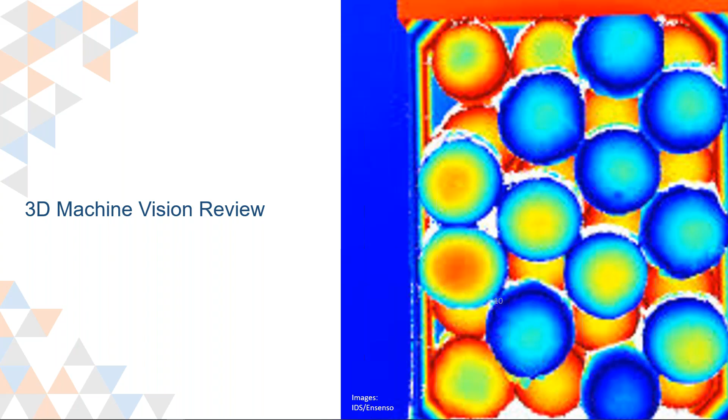So let's start with a 3D machine vision review, going over the concepts of 3D machine vision in the context that we're discussing it today. So really, when we think about practical 3D imaging for automation, it's one of those many machine vision tools that enabled what the marketplace is now calling Industry 4.0, reliable autonomous automation, the ability to have smarter factories, better production, better efficiencies in production. This is what the industrial marketplace is looking for, and it goes without saying that machine vision and its close partners in technology, robotics, and other automation technologies

have been at the forefront of driving these concepts in Industry 4.0, and all are data driven, all are data consuming, and machine vision, and particularly 3D machine vision, is certainly here to stay as a key component of smart manufacturing Industry 4.0. So that's our context as we think about practical 3D imaging in our particular environment. When we think about 3D imaging, we're really asking the question: why use 3D imaging?

The fundamental point, and I think this gets lost in the translation sometimes as we talk about the 3D imaging technologies, is that the entire point of 3D imaging is to provide us some content, some data in the image that comes from a different place than just grayscale or color content, the kind of content you would find in standard 2D imaging in machine vision.

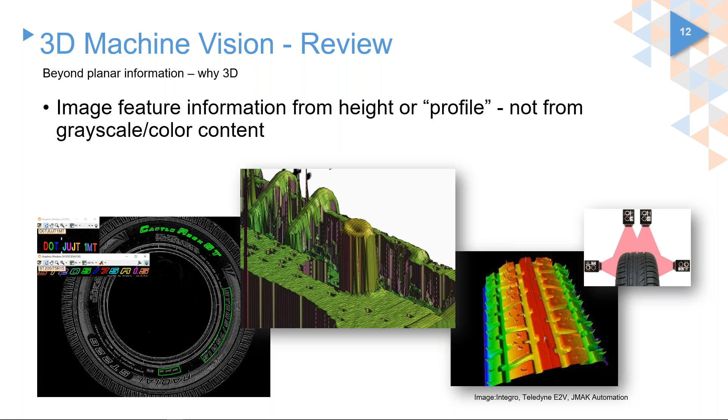So we're not just talking about getting that 3D image, but we want to keep in the back of our minds that we want that height or profile information from the 3D image so that we can use that in our processing. Now, how do we typically use this information? Well, in general,

many of the things that you might think of in 2D machine vision in an industrial environment lend themselves to 3D imaging. Again, in that context where the main point of our work is with the height and profile information. So the ability to look at feature and object geometries for measurement, identification, quality inspection, except that we have the ability to see that in 3D. We can extract information based on the height and planar information of the object that we see, rather than having to segment it based on contrast.

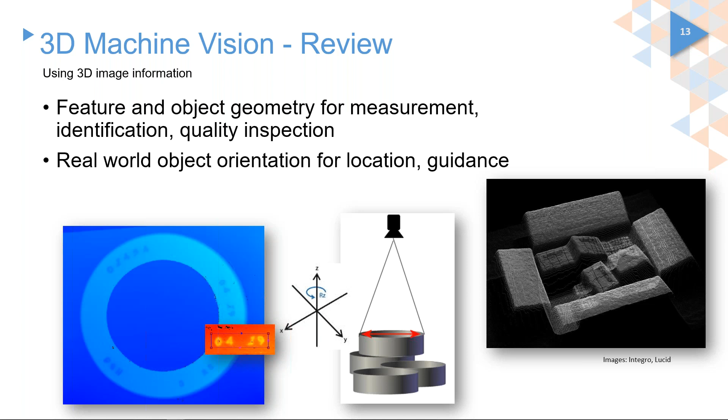Of course, one of the key uses for 3D imaging is real-world object orientation. It may not just be for robotic guidance, maybe for location or other purposes, but that's of course a key capability of 3D imaging in automation.

So what is the basic 3D information that we get? Not just thinking of it as a pretty picture, but thinking of the data and how that data is used in the image. All of the data in a 3D image are points in a world coordinate frame. Now, we'll skip the fact for now that frame may be just the camera. It may be an arbitrary relationship in world coordinates, but nonetheless, all of the data are these 3D points in a world coordinate frame.

And then in processing, the information must be combined or isolated to form geometric structures so that we can do those application tasks that I just mentioned, utilizing that data. Perhaps extract the features, perform measurements, provide locations, and much, much more. Keeping in mind that this is all based on segmentation of these features, not utilizing grayscale, but utilizing height and planar and other primitive geometric information from that 3D image.

A quick word on how the images are represented. I think this is one of the things where first-time users of 3D machine vision, or folks who are just entering into the 3D machine vision space, get a little bit confused and not quite sure of what we are seeing when we look at the 3D images. The vendors of 3D components, the people who create and provide the software, all provide wonderful visualizations of the 3D data. But the point I would like to make here is that these are visualizations and not necessarily the raw data that's being used in your application.

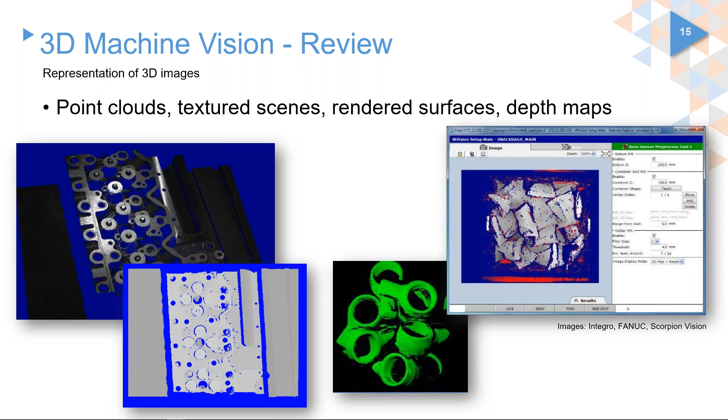So with that, a quick review of how machine vision works within the automation environment. I'd like to move on to some of the evolving technologies and components, and in this context, continue a little bit in our discussion of reviewing what 3D machine vision is and how 3D machine vision works in actual practice.

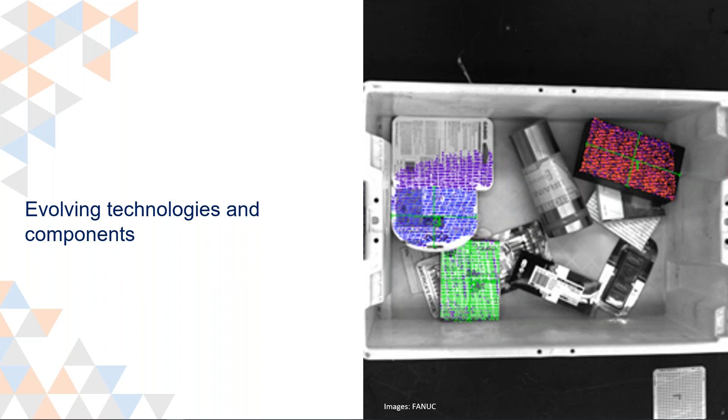The name of our webinar today being Evolving Emerging 3D Machine Vision, I wanted to kind of take that and describe what I think we're experiencing in terms of evolving technologies and components. And one of the big things that's evolving right now is not so much the technology, although I'm going to discuss some of the things I think are really moving forward in technology. But the one thing that I think is a strong evolution is the marketplace evolution.

We're seeing continued growth in the marketplace, and by marketplace, that means those people who are supplying components, supplying technology to those of us as end users. There's continued growth, continued advances in these 3D imaging components and technology, and that marketplace growth is not only, I think, the most interesting growth and interesting evolution in 3D machine vision, but also one that is really going to benefit us moving forward as we find more vendors working to deliver better and better technologies that are applicable to more end use cases.

I think that we're going to see higher usage of 3D machine vision, higher reliability, and less end user concerns about implementing 3D machine vision. So keep an eye out for that. I think that even in a period of several months, we see continued changes in what the marketplace is offering in 3D machine vision and ways that you can use it in your applications.

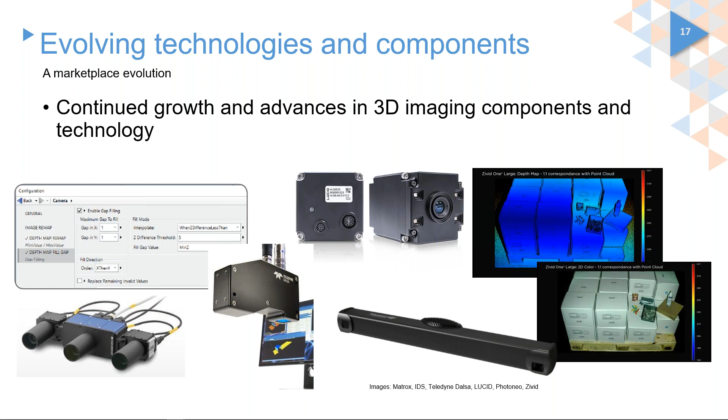So having said that, let's look at some of the technologies, look at some of the components. And the place to start is to understand the role of 3D imaging components. One of the things that gets perhaps lost in the translation sometimes is that a 3D machine vision camera or a 3D machine vision imaging system is primarily an image acquisition device. I'm not going to compare it to a dumb camera, but I want to comment that the device is there primarily for image acquisition and to provide, as we'll learn later, a group of images that when combined or when processed can create a 3D scene that ultimately you can work with.

So given that we're going to think of this 3D camera, 3D imaging system as an acquisition device, what are some of the differentiators? One of the big differentiators in the marketplace is the technique used to capture that 3D information. And sometimes, depending on the technique, you're able to relate a technique to specific use cases for your applications. Some techniques lend themselves to certain applications. Some imaging techniques just plain don't lend themselves to those applications. And we're going to mention those as we go along here.

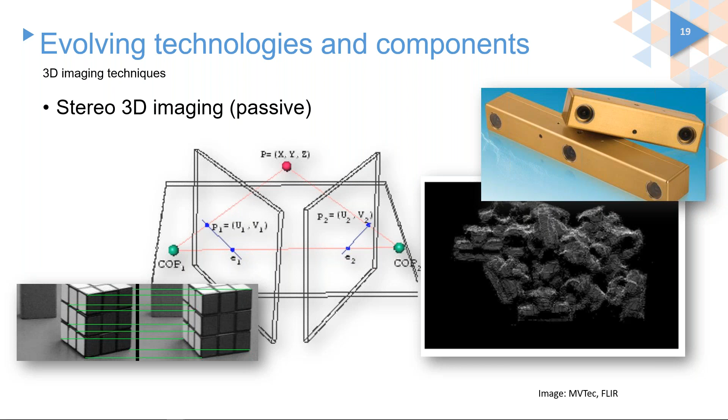I've found in a couple of applications that passive stereo 3D imaging actually can be more effective than some of the other, what we might call more advanced 3D imaging techniques because of certain characteristics of the surfaces you're going to inspect. But we'll call that a basic stereo imaging technique, and then move to another very popular and widely used technique, and that is structured light.

Now, when we're thinking of this as a stereo camera or even a single camera, this is sometimes generically referred to as active 3D imaging. If you think about going back to the binocular or two camera stereo imaging, if we're looking at objects that don't have any texture, what we would call texture in the 3D imaging context is features in a grayscale contrast context that help to identify correlated objects from one camera to the other.

Think of trying to look at a bare wall, a blank wall, and judge the distance to that wall if you have no other references. The same thing happens in 3D imaging, in that if we don't have references to the surface that we're imaging, or to the content on that surface, one of the ways to overcome it is to provide your own references, and that's done by aiming structured light at the objects.

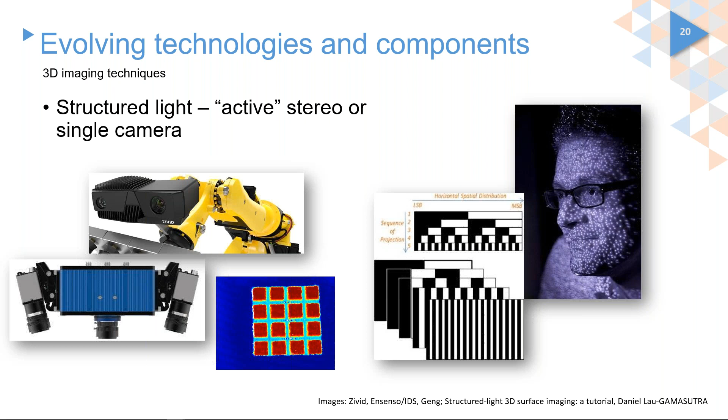A whole different class of 3D imaging in terms of imaging techniques is laser triangulation devices.

Once again, I'm going through some pretty common and widely used 3D imaging techniques, and laser triangulation, sometimes called in the 3D world sheet of light analysis, uses a laser line. I don't want to say simply, because it's by no means completely simple, but it is simple to understand.

We use a laser line and a camera at an angle relative to the laser line, and if you use your imagination, you can see that as that laser line encounters objects of different height, the position of the laser line in the image relative to the object and its background will change.

Now, as the camera is calibrated and physically aligned with the laser line, that camera will start to see that laser line in different spots in the image, and knowing the proper calibration or having a pre-calibrated sensor, you can triangulate exactly where that laser line is relative to height by seeing where it is relative to the vertical location in the image itself.

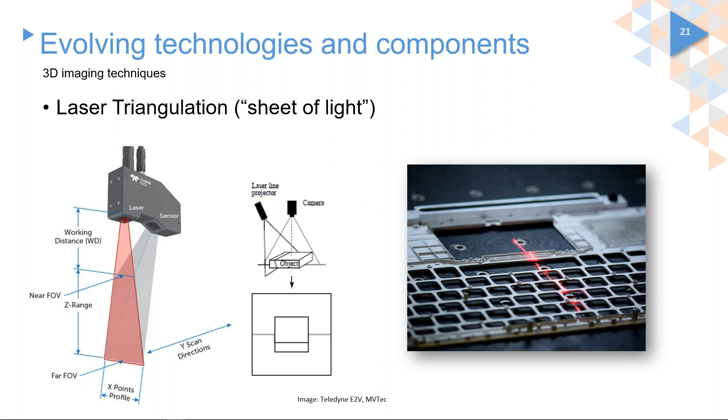In this case, this is a scanning technology where the part or the triangulation device has to be moving as it takes its image, but it's a very efficient device and a very accurate device, having some capabilities in many cases to achieve better accuracy than the first two methods we just discussed.

And in going over some of these basic 3D imaging techniques, one I'd like to include that at one point was considered a truly cutting edge technique, but is falling more, I think, into very mature, very reliable, very usable 3D technology, and that's time of flight.

Now, it is definitely an oversimplification to say that a time of flight camera measures the time between a light being sent out and the time it returns to the sensor.

Time of flight cameras do not actually measure the speed of light, but through different techniques, either pulsing lights or modulating the light in phases, time of flight cameras are able to compare the light going out relative to the reflected light, and by doing so, for each individual pixel on the sensor, analyze the distance that light's traveled relative to the sensor itself.

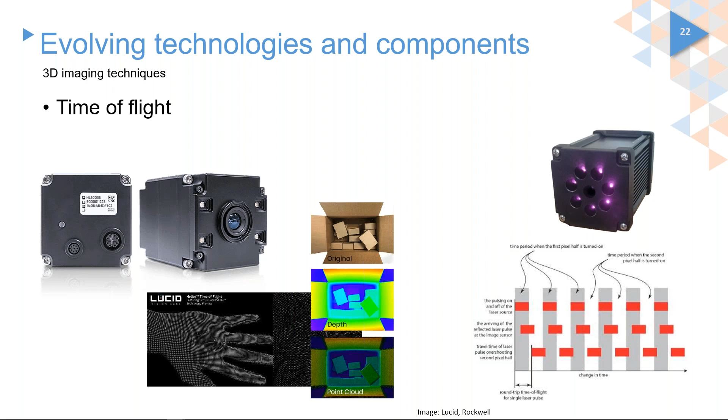And it wouldn't be complete if we didn't talk about image acquisition software in 3D imaging techniques. Why do I group software in with the 3D imaging components? The reason is the software is absolutely required in order to create the 3D image from a grayscale image.

Some of the things that have to be done, of course, are calibration of the camera relative to its scene, so that regardless of the type of inspection, in the case of stereo, structured light, stereo structured light or sheet of light, it can relate that grayscale information to a 3D image.

Some of the execution techniques would be image rectification. That's matching the left and right images to each other. Creating a disparity map. I mentioned that disparity is the difference between the observed location of the object in one image to the observed location of the object in the other. These apply to stereo structured light.

In the sheet of light imaging technique, the software has to combine the individual lines that are taken as the part's moving past the sensor or the sensor's moving over the part. And that combination and translation of the position relative to its actual Z height is a function of software, not accomplished by the imaging system itself.

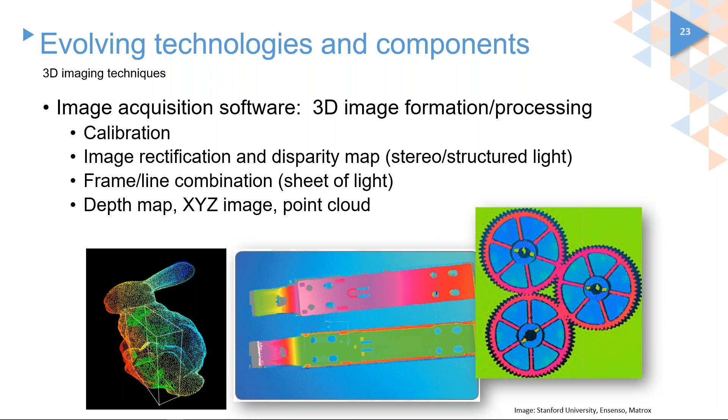And then the creation ultimately of what you end up using in your applications, perhaps a depth map, an XYZ image, perhaps even a point cloud. That kind of processing, again, has to be accomplished through 3D software. The good news is that we find both SDKs and, as we'll talk about in a minute, even onboard software that performs these in our marketplace very, very well and very efficiently.

How about a couple of emerging 3D imaging techniques?

I've mentioned these other techniques for reference, and they are the techniques that I think are more fundamental and more mature in the marketplace. Some of the newer techniques: one is combinational, or what the market calls computational imaging. You can do a lot of things with this, and the baseline premise of computational imaging is that you combine, and that's why it's sometimes called combinational, but you combine multiple images, usually at least 4, but sometimes more, to create a 3D image in a variety of ways.

One of the classics and one of the most widely used, in this new technology, I should say emerging technology, is photometric 3D. Certainly something that's been around a long time, but becoming much more popularized by the readily available lighting techniques and readily available software to do photometric 3D. Shape from focus is another possibility with computational imaging, and even 3D from polarization.

Some of the newer cameras on the marketplace are called polarizing cameras, and they through their sensor provide 4 different polarization angles in the image, and 3D shapes can actually be discerned from manipulating those 4 polarized images.

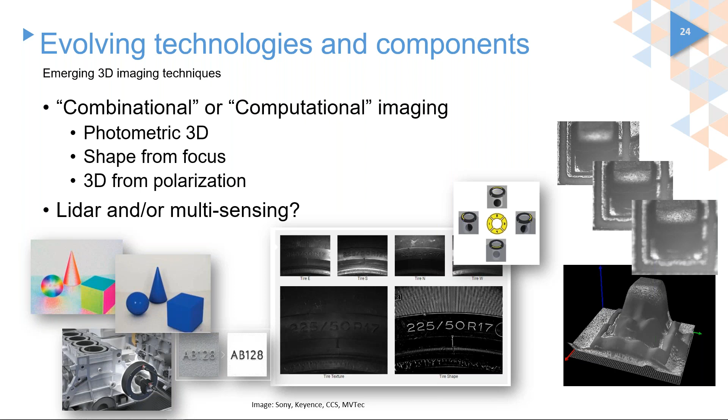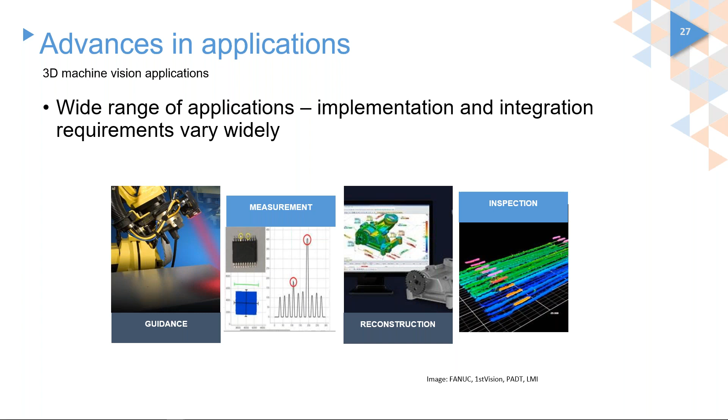And I mentioned a few here. This is pretty straightforward. Guidance, of course, is a well-known task where we could benefit from 3D imaging and robotic guidance. Measurement, when we need to measure things that are not so reliably imaged in a 2D environment. Reconstruction of images for CAD modeling, even just generalized inspection. All of these lend themselves very, very well to 3D imaging. But as I said, the implementations vary widely.

And one of the advances that I see and I can be confident of in the current marketplace in applications and in software is the direction the software is taking us: more capable 3D software, more widespread availability of 3D software, and the development by some manufacturers of more configurable application-based software, so that typical tasks are more automated and easier to use.

The decision you have to make in 3D imaging is, are you going to go down a path of programming, or are you going to try to go down a path of configuration? If you're doing programming, a few libraries exist in the marketplace that are extremely capable and target themselves at providing 3D imaging capabilities for industrial applications. And they're not only expanding in availability, but there's also an expansion of available tools and the ease of use of these tools, say macro tools that allow you to program more easily typical industrial automation functions using the 3D images.

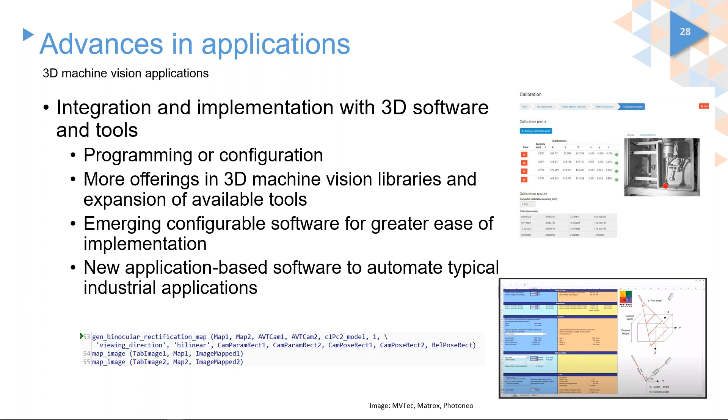And then finally, the application-based software I mentioned, where if you want to do robotic guidance and bin picking, you are able to go out now and find a configurable application that allows you to do bin picking in a somewhat constrained way. But I think we'll see more and more of that, and that's where our application environment will advance in 3D machine vision for industrial automation.

Let's conclude with just a couple of implementation notes. We didn't get a lot into the differentiation and selection of components, but let me just leave you with a couple of thoughts. The technologies, as I said earlier, vary widely, and the suitability for a given application varies in the same way. Some 3D imaging technologies are more application specific and lend themselves to a certain application. Some are more generic. It would be a whole other webinar to discuss which are which for a specific application, but I'd like you to take back with you the idea that you have to consider what is best for your application. Just a couple of generalities that may help you think about this.

And this is, again, very much a generality, not a fact for all components, but the potential depth resolution and height accuracy varies between products. Traditionally, time of flight and some other techniques like depth from focus or photogrammetry tend to have slightly less height accuracy than might be achieved from stereo cameras or structured light or sheet of light systems. Interferometry, which we didn't discuss, is more of an offline 3D imaging technique, being one of the higher accuracy 3D imaging techniques.